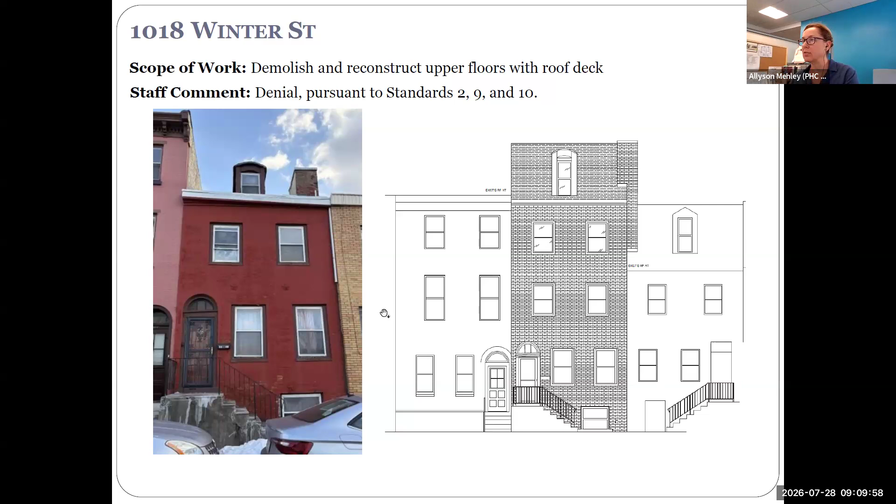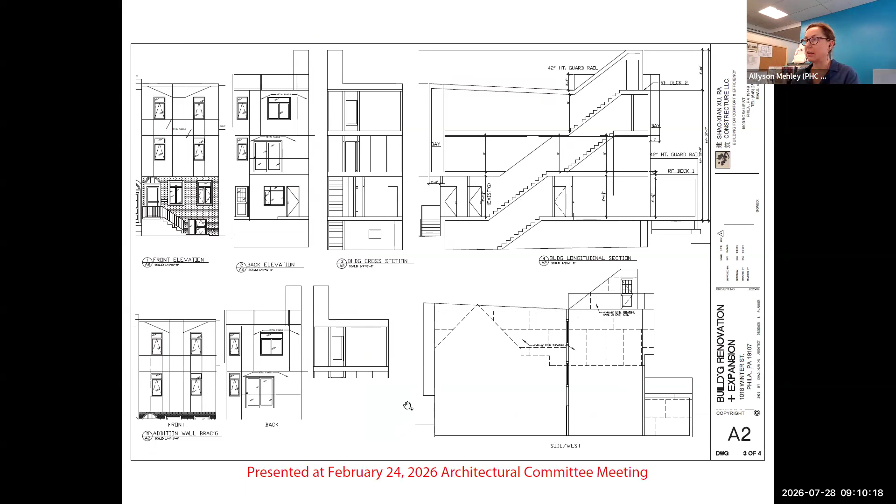To touch on what I just spoke about, this is what was originally presented to you in February. It included maintaining the first level and reconstructing a new second and third floor, and you could see the rear of the property. At the commission meeting, it was revised to maintain the front, the main block, with all new construction occurring at the rear of the property. That brings us to today and the current proposal.

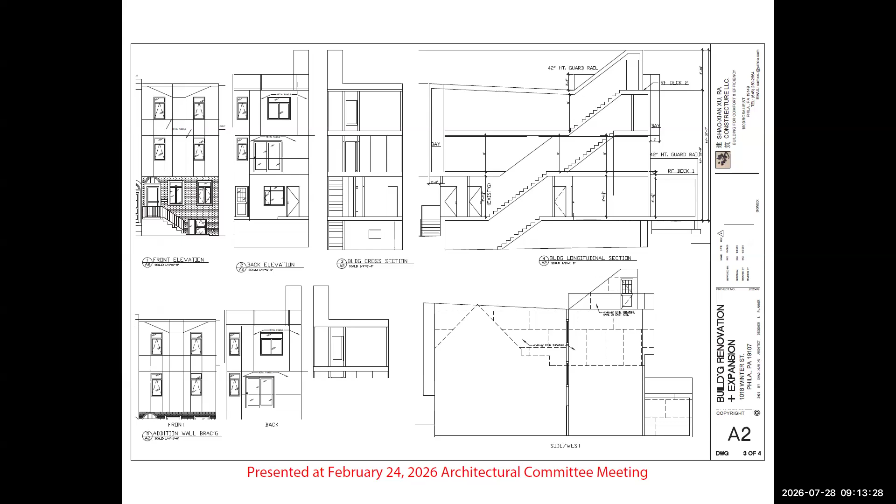The first submission was probably too much of a change to the front, particularly to the gable roof, which was completely different from the original style and material. So after the first review, we made changes and tried to keep the gable front, making all the changes in the back. But when we had the architectural report by the engineer walk through and identify the problems, we found there are too many issues to deal with.

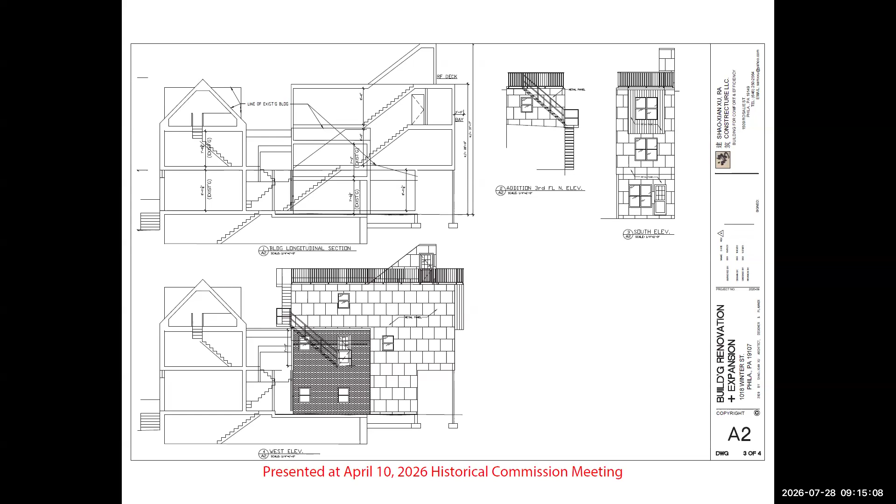Even if we make changes according to the engineer report, the end result is still very poor. In particular, the changes made throughout the years made the interior spaces very awkward and difficult to use, and the original stair is very small and narrow, completely outdated and not up to today's use standards. It also has multiple levels with a lot of different twists and turns, making it impossible to work with. Even if we try to modify the stairs to meet today's standards, there's just not enough room to make it work. So the engineer report recommends replacing the front brick wall because it's leaning and needs repair.

The gable joists are also undersized and sagging. So with all those problems, we considered the design, taking everything into consideration. We tried to keep the original appearance, but it's just not at the same height as before. Since we have to do all those engineering changes, we thought maybe we can raise the front gable by 1 story, to simplify things and make all those problems easier to resolve.

So we came up with this front gable raised 1 story, with the roof deck on the third floor accessed by the dormer. We made use of the good components, like the breezeway brick wall, incorporating it into the expanded back section of the building. That's basically what has been changed for the third time.

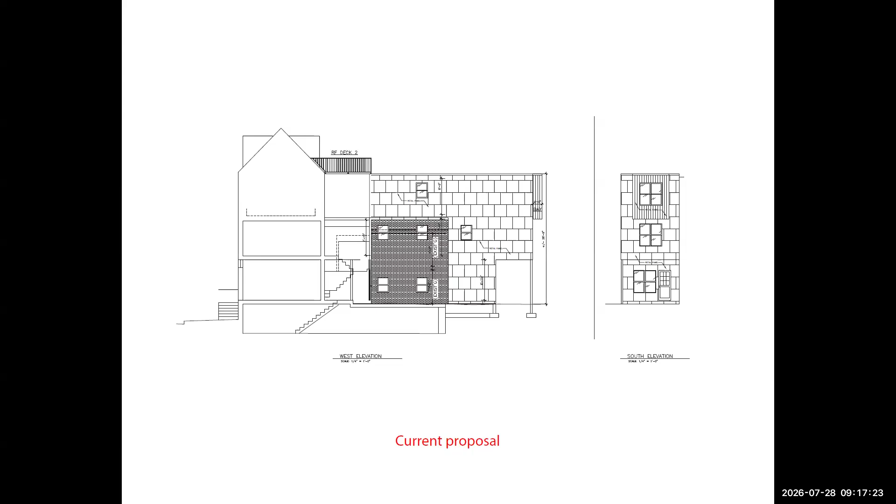So by doing so, we hope the front is very similar, except for its height. We try to keep the same appearance.

Excuse me, similar, Mr. Xu. We've reviewed the application and the documents submitted. It would be best that you focus on the engineer's report, which says the building needs to come down, as opposed to walking us through your documents, because we only have a limited amount of time to review each applicant on our agenda today.

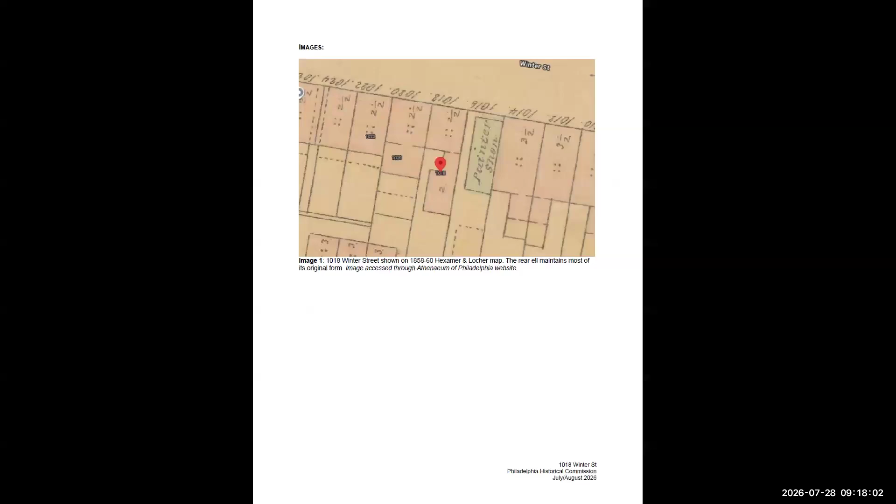Right, yeah. The engineer's report identified many problems and issues, and we are trying to keep what is still good and incorporate it into the design.

But I don't believe the engineering report is recommending total demolition of the building. No, it's not recommending total demolition. Most of the wood framing can either be replaced or sistered to address deficiencies, whether they're deterioration or undersized. It looks like the rear masonry wall could remain with repairs.

And I guess the roof framing is probably the worst of it. It looks like the biggest recommendation I saw was related to the front wall. I don't know that this is the right platform for me to agree or disagree with another engineer's report. I don't know that I see the exact same things, but these are just limited snapshots in time.

I guess my understanding would be that if you're replacing this wall, you would be rebuilding and replacing it in kind, because this is an individually designated property. So structurally, if you need to replace this wall, you would have to rebuild it as is, salvaging material that's there. I think you could save this.

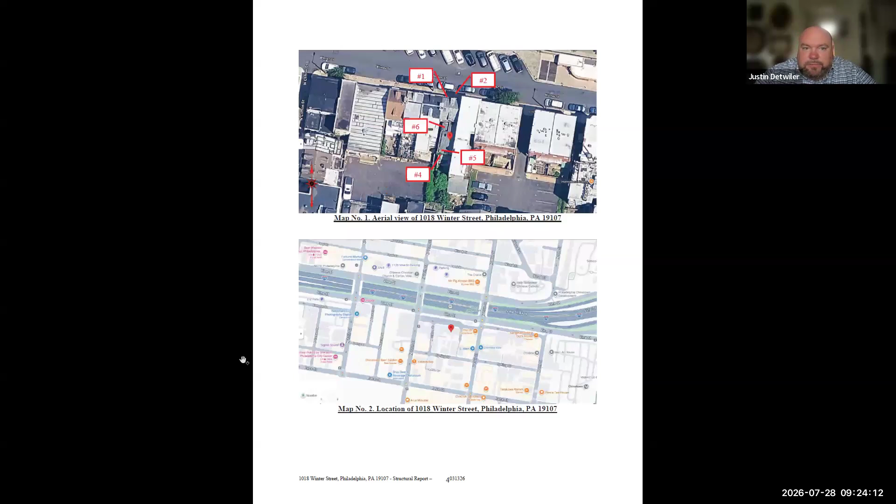Yeah, I do agree with you, Allyson, and with the previous committee and commission discussion, that this is a much better approach. The rear of the property is where the density should happen, and the current scale of the front of this building is the most important thing to preserve. So if we could go back a step to that scheme, I do agree that the overbuild in the back is a bit tall, a bit bulky and boxy.

But I think having that as a separate piece is preferred over attaching it to the front building, as we're seeing in the revised proposal. I think this overall is a better proposal. There are things that could be improved upon, but overall it's a much better approach.

Are there any more comments by the committee?

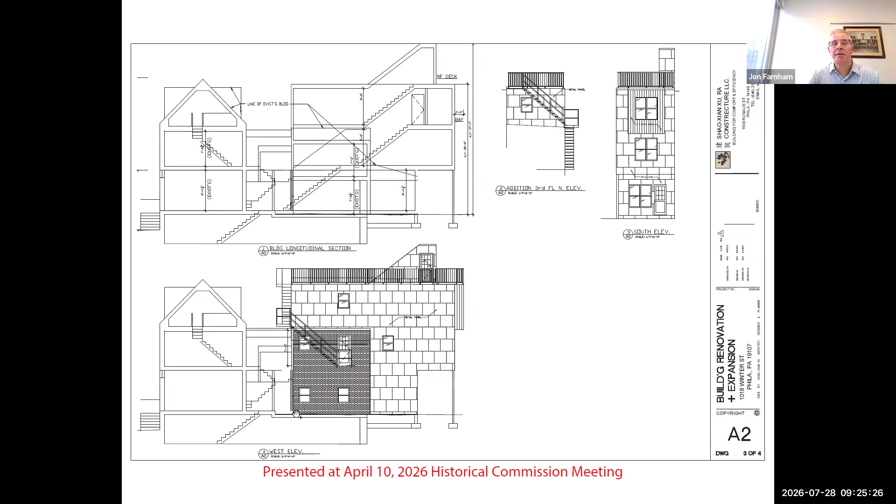John or Allyson, are there any public comments? Yes, one hand is raised. Ben Shi.

Hi, can you hear me? Yes, we can, Mr. Shi.

I'd like to give a comment in support of this application. In general, I think adding density here is really needed. The applicant's family are noted community leaders in Chinatown, and they've really been driven to increase the number of housing units in Chinatown. It's a really important issue for the community, as I am also involved with the community. I'd like to note that in terms of actual strict density, even with reconstruction of the front facade as 3 stories plus a dormer, that matches in totality with historical structures just across the block, even at the 900 block of Winter, where you have existing 3-story front facades with dormers.

So it's not like anything here would be out of context for the neighborhood.

This is a very predictable, very expected type of building typology being proposed here. This really comports with the incremental style of densification that Philadelphia row houses have received throughout the centuries. I know this structure was only designated because it was old, from the 1830s, but I think the overall intent of preserving, especially the arched doorway, the brick facade, and the arrangement of the bays and windows, justifies a lot of what you see here. Any rear addition, like other people have said, could compete with the actual roofline from looking at Winter Street. So I really want to commend the developer and the proposal here for creating what looks like a very compatible development and style with the overall context of Chinatown.

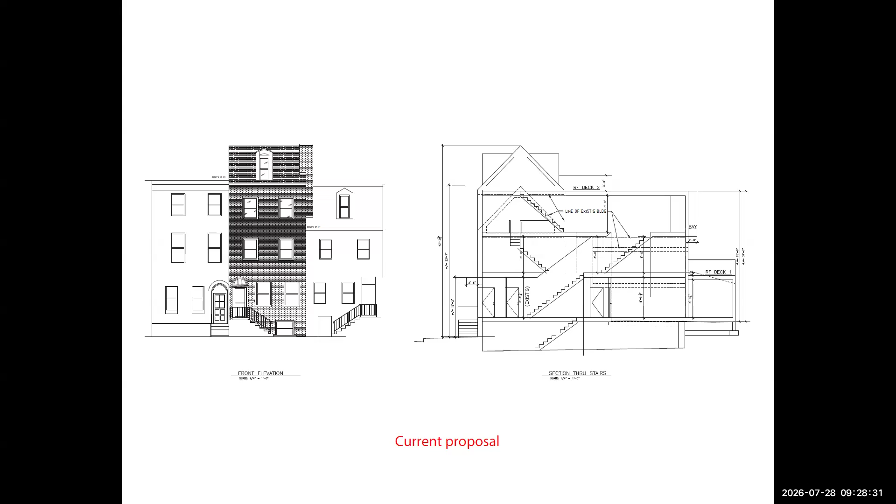Thank you. Are there any other public comments?

No other hands are raised.

Okay, can I get a motion for 1018 Winter Street, please?

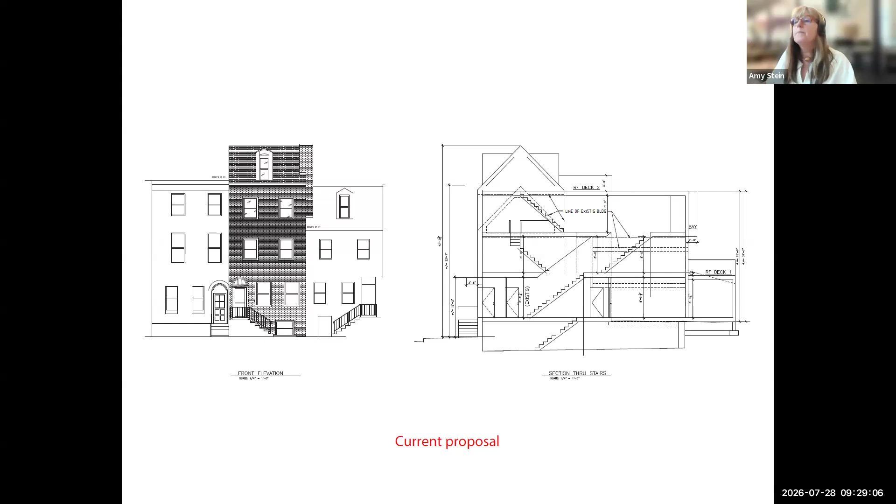I can go with the staff recommendation of denial pursuant to standards 2, 9, and 10. Do I have a second? I'll second. All in favor of the motion, please say aye. Aye, aye. Okay, the motion carries.

The next applicant is 124 and 126 South 7th Street.

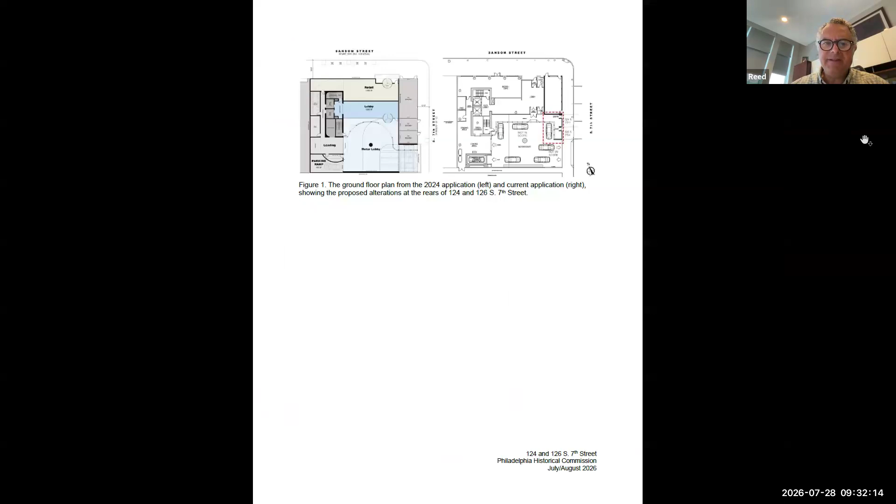Sure. I don't think anything was approved prior as it relates to these two properties specifically. We went through an extensive process on the rear property we own, the development site at 708 Sansom. These two properties are on 7th Street. As Kim mentioned, we're here solely because they were included on the Preservation Alliance's nomination for the Historic District for Jewelers Row. As Kim noted, both buildings are dilapidated and out of use, and have not been visible other than from the streetscape, because of the rear properties that used to exist.

For context, we've met with the Preservation Alliance, who I believe Hannah is here representing, to review our plan since they were the nominator for the district. We've also met with the Washington Square West Civic Association and the Society Hill Civic Association, who are constituents, and received no opposition to what we're planning. The plan is to refurbish the storefronts as they exist and make them functional, and we will do so in accordance with the standards under the ordinance as we review with staff. Happy to hear any questions you might have.

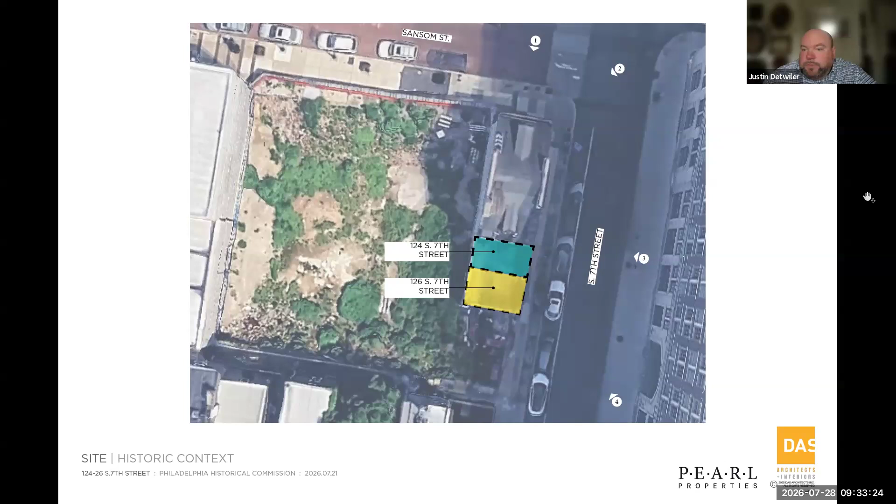So in essence, they're becoming a screen, right? They'll be open at the rear. It's a front facade, but completely open to daylight at the back. Is that right? Well, yes, you can see the plans that are attached. So we've made them as functional as possible.

So when you look through the storefronts, you're seeing the motor court beyond, right? That's how you would get to the motor court. There will be, on the 124 side, a door. I'm just trying to understand - there's no frosting on the glass, or anything else. You're seeing through them, and I'm not saying that's a bad thing.

I'm just asking. Well, we've articulated - if you pull back on the first plan, you can see the elevation, the rendering, which gives you a sense of what it will look like. But basically, you're not seeing anything. You're seeing a blue rectangle.

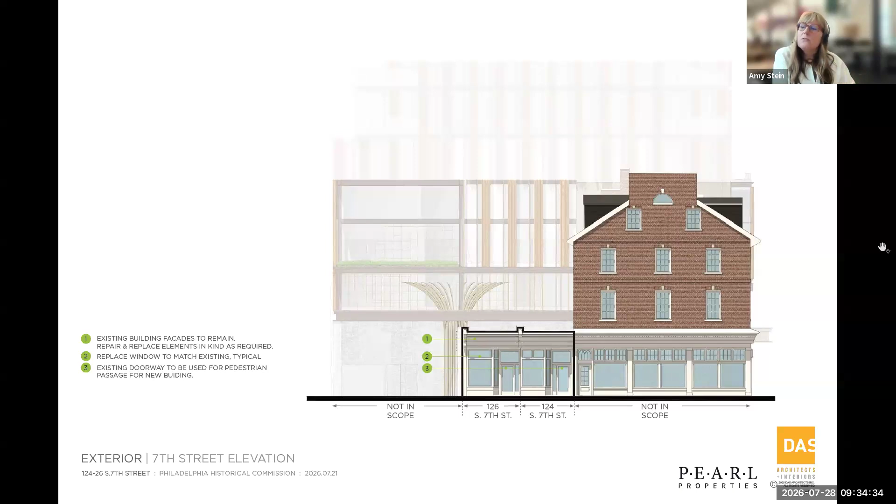How will the glass be treated? Will the glass be painted at the back side? Will you be able to look through the glass? It's not really a building, it's a false facade, so we're just wondering how that will be treated. Will it be transparent? Will it be opaque?

Well, we would need to review details, obviously, with staff as we pursue once we get to that stage. Is there a roof on this object?

Jay, do you want to jump in here and give us some context? Yeah, this is Jay Rockafellow from DAS Architects. Yes, there is a roof just over that first 3 or 4 feet when you come in. This is kind of creating a gateway to that motor court. I believe the intent now is that it will be clear glass, just to try to get as much light as we can into that space.

So it's a functioning pedestrian entrance into the motor court, basically. Yes. Okay.

And the wall - I would just say it was a little challenging to review because there's so little information. I would ask that before it goes before the full commission, there be a little bit more detail here. There's no dimensions - there's only one dimension on the entire thing, which is the side partition alongside the driving lane. So, how big are the doors?

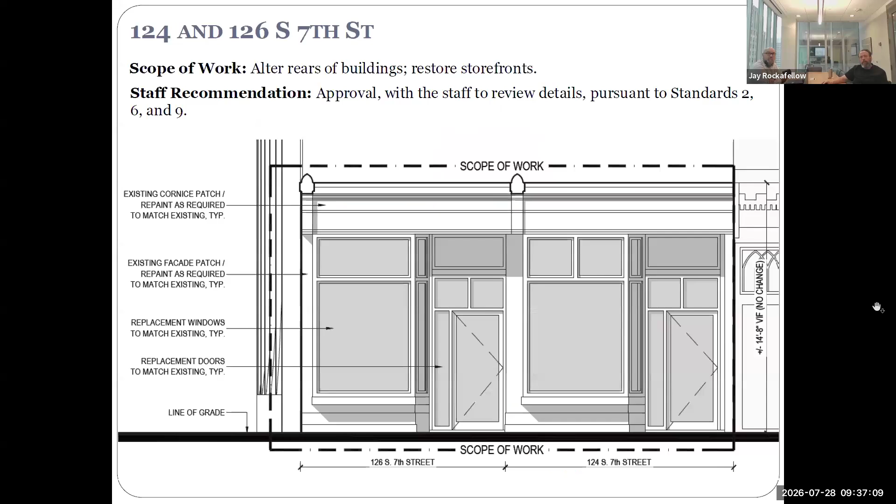So how big are those doors now? Are they 3-foot doors? Are they 2'6" doors? What's happening? They're 3-foot doors. And as mentioned, we would lower the sills to make these ADA compliant, because right now they have steps up, so they would get a little bit taller than they currently are. But they would be the same 3-foot doors that are there.

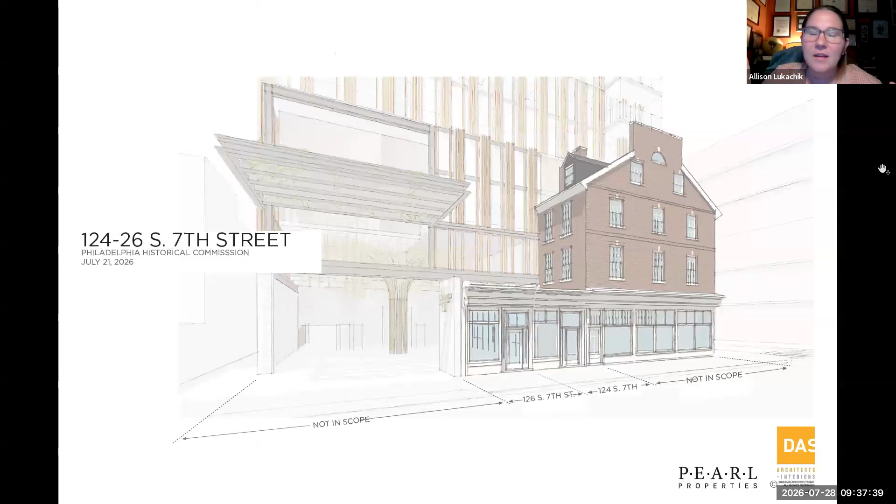Can I- I'm a little curious too. So it's open at the backside because this is now a portal, and there's like a tiny sliver of roof over it, and that's what it is? Correct. So, I mean, I'm just curious,

like from a stability perspective, we only have this level - how is this? I see you're adding some columns. I don't know if you're adding braces that's going to ultimately brace this wall for the long term or provide any sort of stability. It was a box in theory and it had stability from that, and now we just have this sort of portal, and it wasn't designed originally as a portal.

So I just want to make sure that what we're doing here is intended for the long term, and we don't have in 10 years an issue where it's falling apart and we can't fix it to save it. We are intending on adding kind of a steel frame - that's what the columns are, sort of at the exit.

We are adding a screen wall also at the southern side there, for its lateral stability. So this will all tie back in together into our new structure to reinforce it. And then everything is just being detailed to be what was once an enclosed building structure - now it's being detailed and treated as an exposed condition. Correct. Okay.

I guess, go ahead, go Amy. No, go ahead. I wanted to shift topics actually. So if you had a question about that, please continue.

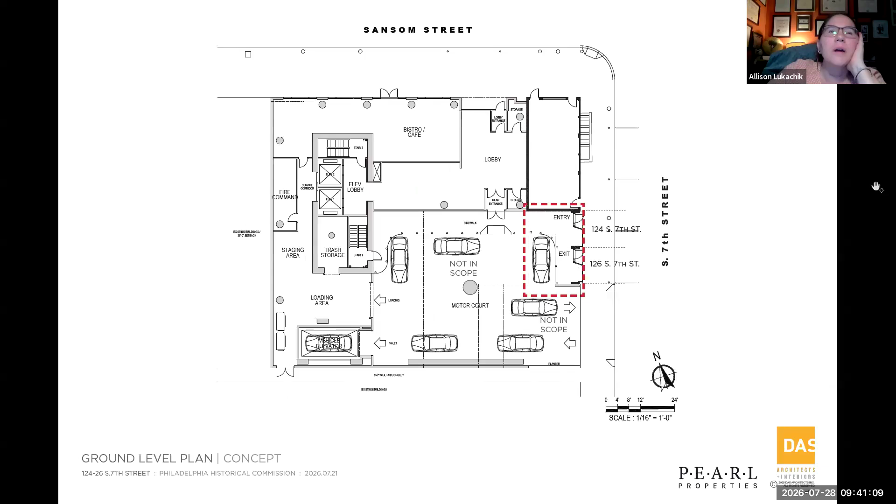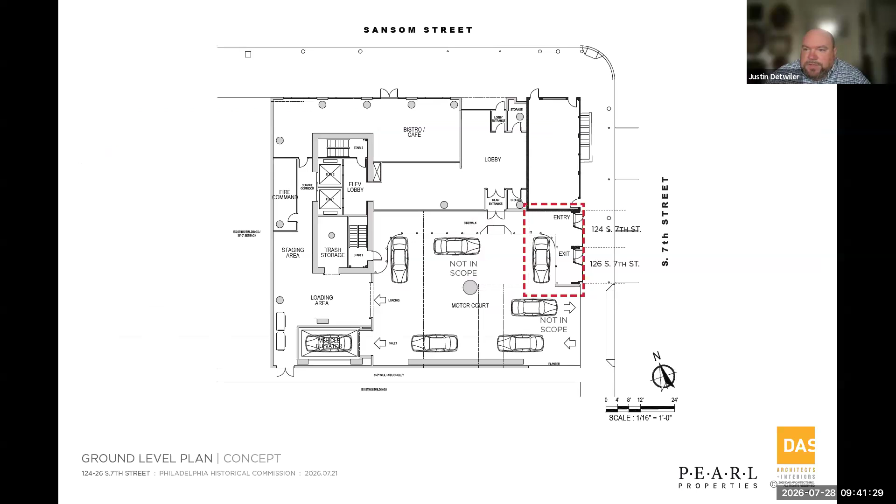So you're saying that sheet 9 of 11 is not what's proposed? I think sheet 9 of 11 shows how much of the existing structure they're proposing to retain, so that they could install a new column and then have their bracing and what have you to sort of stiffen it. And then in front of that, they'll build the mosaic wall.

Thank you. I think if you could just add a little bit of this information before it goes before the full commission, it would be easier to review, because I went back and forth trying to understand this, and it's actually very simple. Yeah, I think a little more information would help, because I missed it in the perspective, but now that I'm looking at it, I do like how that reads.

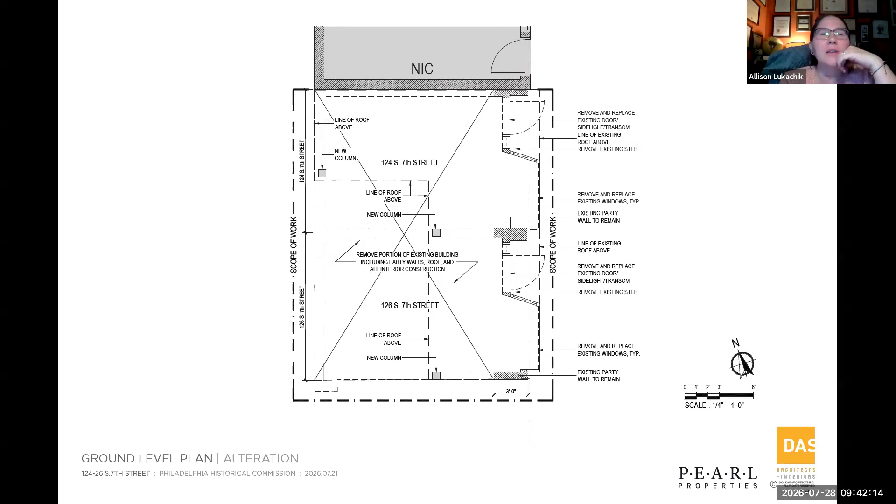So I agree that in theory and principle this works, particularly with that wider end wall. My question shifts gears a bit: we're building this massive high rise next to this tiny storefront and trying to preserve it. I'm wondering what protection strategies you are employing on the roof, the dormer, and the delicate details of the rear L that you're preserving during this massive operation happening behind that building. I'm concerned it will get hit by material, something swinging or dropping. Is there any mitigation strategy to protect the building, or any way to test whether it's moving?

I can take that, Jay. We will obviously need full permitting from L&I for the project, and that will necessarily include all of the safekeeping you're talking about. We've done a number of large high-rise developments in the city, and we're very painstaking about protection. We understand those issues, and actually this will enable us to be better at that from an overall site standpoint.

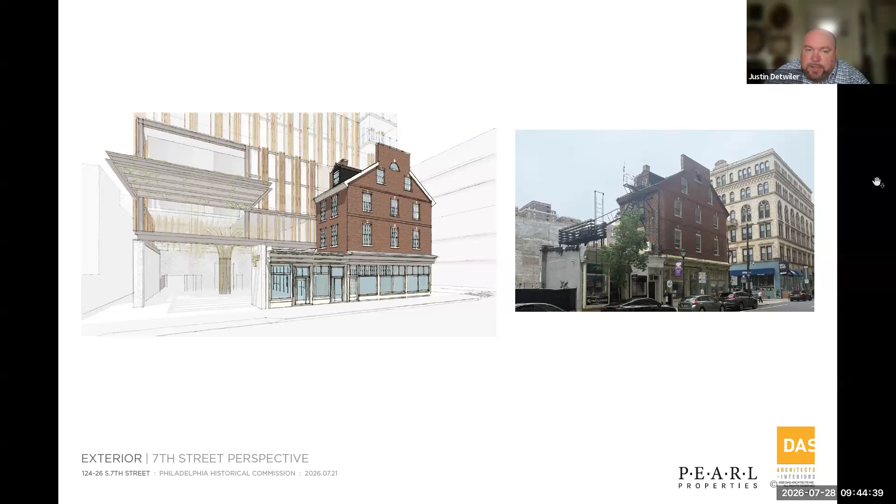Back to my earlier question about what is being replicated in this reconstruction or repair of the facade. I personally feel that what gets put back should not be a bastardized version that existed or was modified over time, but should have that historic original look. I would say it should have the type of window or door it previously did. I know those were double doors, but maybe they could be made into a single slab, so we're not replicating a door in an aesthetic that is not historic.

The character of this building is an earlier age, and so I would request that it has that earlier appearance as shown in the historic photo.

Are there any more committee comments? Kim, are there public comments, or John? Yes, one hand raised, David Traub.

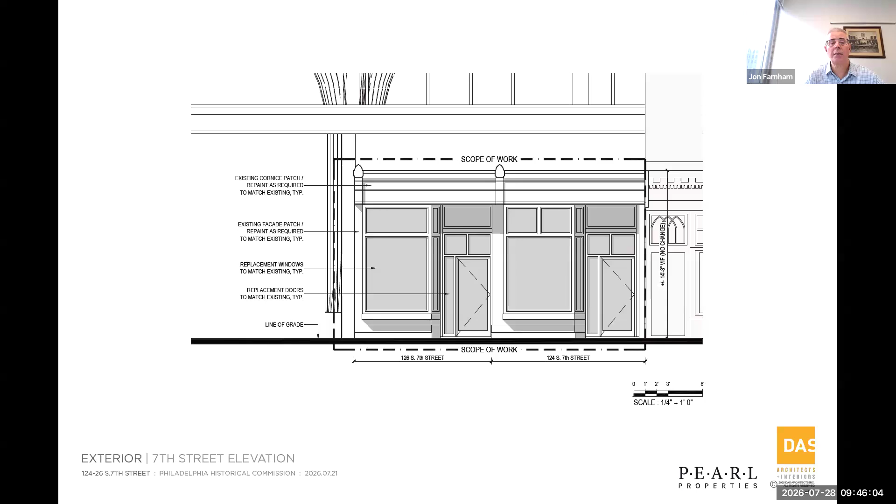Good morning, David Traub, representing Save Our Sites. Just a few comments about this proposal. I walked by the site yesterday and I was immensely impressed by the character and charm of the two little buildings. They're the sort of things that make Philadelphia really a very attractive city, unusual and in a special way. I do feel there will be a loss to the city and the immediate environment if these two buildings are turned into entry and exit ways. There's a little shop there in one of the buildings. It wasn't open yesterday, but it has great charm, and retaining retail on the street does add to the viability of the streetscape.

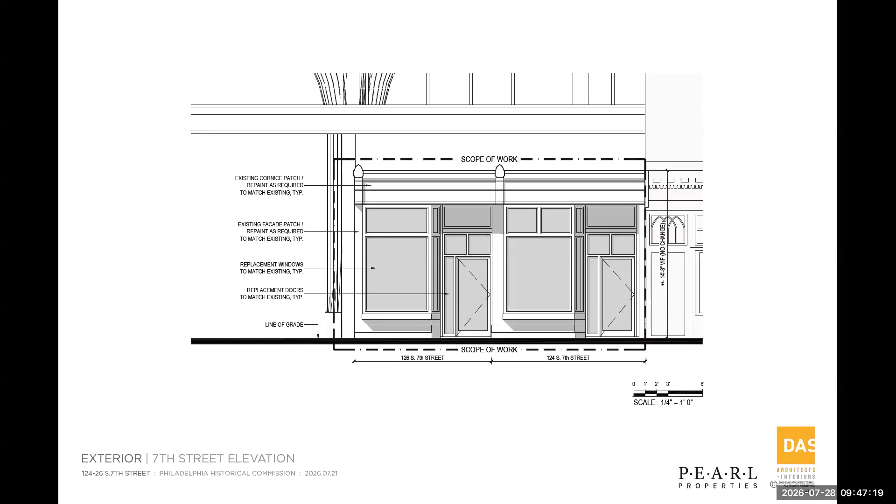Also, it occurs to me that the opening for the entry of the cars is very wide, very gaping. Is it possible to carve out the entryway in that sector of the property? Maybe that's not possible, I haven't studied the considerations, but that would save the two little buildings and have them retained as what they are.

Having said all of that, maybe what I propose is not possible, but I do agree entirely with Mr. Detweiler that the south wall of the building should be extended the full length of the existing middle buildings. It should read as a structure, as he says. And I agree that the detailing of the two little buildings should replicate that which is there, or would be surmised as the original historic appearance. Thank you very much.

Anyone, any other public comments? No other hands are raised. Okay, can I get a motion from the committee?

I'll make a motion to go with the staff recommendation of approval, but I'll amend it to say that the south wall should maintain its full width and that the storefronts should replicate the aesthetic of the 1959 historic image that was included in the staff packet, with the staff to review details pursuant to standards 2, 6, and 9.

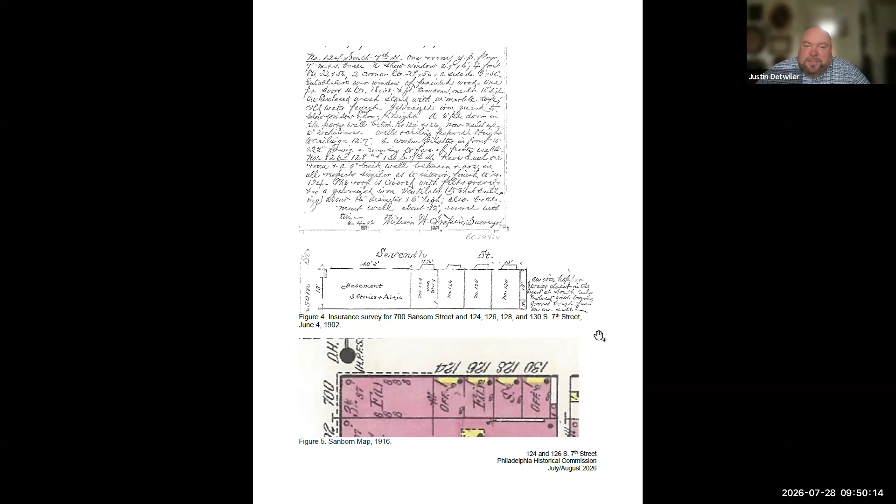I personally think more is better, especially since there's a roof structure cantilevering out beyond it. What do we think as a committee?

If I parse your motion, I mean, I'm fine with half of it because I'm honestly just thinking about the stability of how this all works. Having this sort of wall hanging out there, if you're not going to have a roof really tying it all together, I think the rendering is missing details, but I think it reads as a mass with that 9-foot wall. So that's the only part of your motion that I'm currently taking exception to. I'm trying to figure this out.

No, I understand that and I appreciate that. I think it needs to be 9 feet minimum, no less than that in my opinion. I think otherwise it doesn't read as a building. Right, and 9 is pushing it anyway. So I accept that 9-foot width in my motion.

I would second it. Okay, so Amy made a comment about protection of the existing building. Justin, would you be amenable to adding something in your motion about protection, to ensure there's no damage to that corner building when the larger building is constructed adjacent to it, behind it, above it, etc.? Yes, I would. Doesn't that get into means and methods of construction, though? I'm not saying how to do it, I'm just saying the intent to do it.

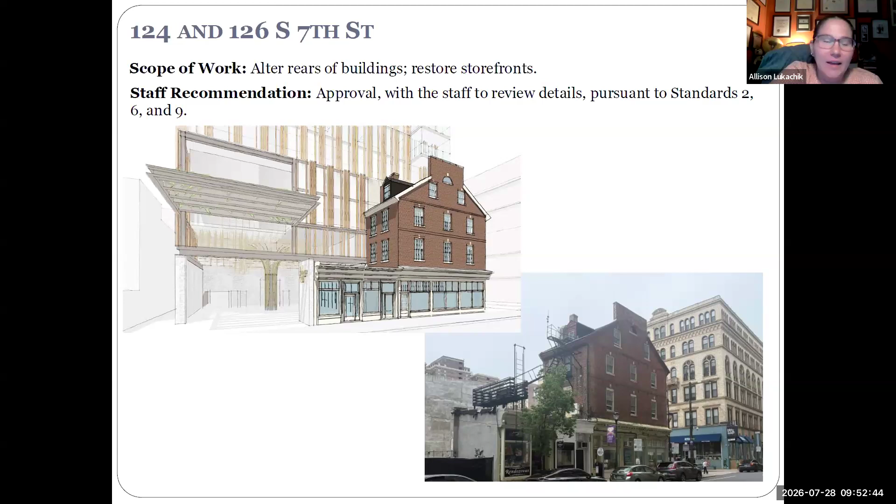Sam, are you okay with that amendment since you seconded the motion? Yes. Okay. Can we? I resecond my second. Okay. Can the committee vote on the motion as presented? Aye. Aye. Aye. Sam? Aye. Aye. Okay. Motion carries. Thank you.

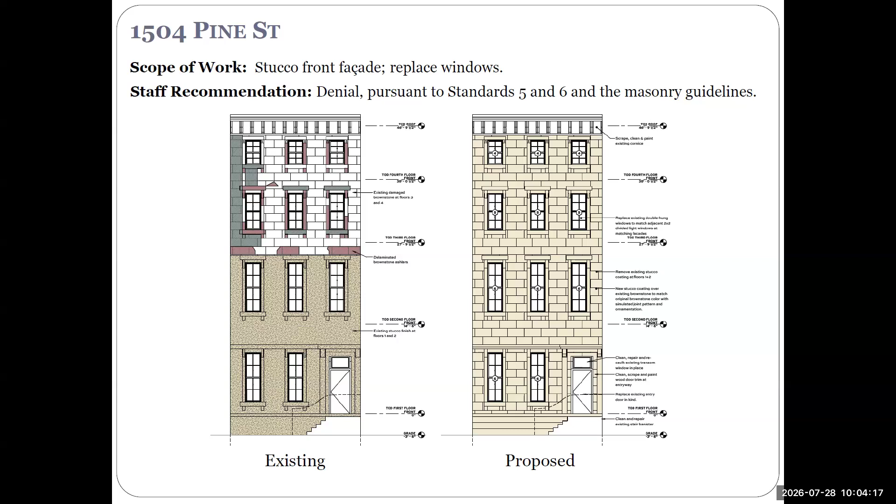I can't imagine that it's easy, or that everybody off the street can do it. And it makes sense, but. Yeah, I understand where you guys are coming from. I've been on both sides of the table.

My only question would be, there are 2 stories of stucco, and if the upper floors could be salvaged pretty easily, what does that look like in terms of this conversation? The other issue with EIFS is that it's basically applying a piece of insulation and then stuccoing on top of that. By doing that, you lose all the profiles of the upper 2 floors. So there's also a loss of historic fabric in that application versus a composite patch, where you can replicate the profiles that exist now.

Yeah, that definitely is true. One consideration ownership made, I believe, is to do typical masonry stucco on top of the brownstone. That way we'd get tighter to the window surrounds and could simulate the mortar beds of the joints. I'm not sure about applying a traditional 3-coat stucco to the brownstone without putting lath on the substrate, so you may end up losing some profiles versus composite patches, which actually replicate all the profiles that may have been lost. So it would be a shame if the upper 2 floors look like the lower 2 floors, but I'm not supposed to be editorial on this committee.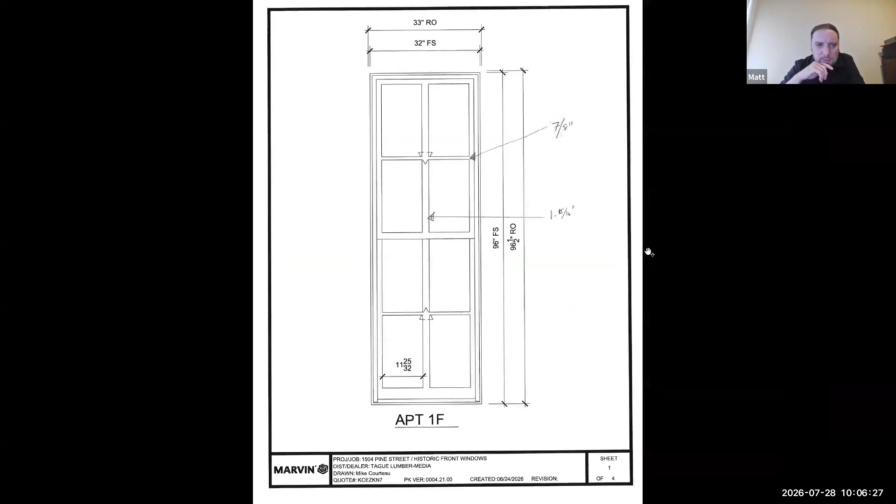Understood. The upper window surrounds are very beat up too. If you go back to the pictures, Ted, you can see a lot of detail if you scroll to some of the buildings that are in better shape on the block. I think it was the next one down, maybe. We had a few pictures of buildings in good shape on the block. Maybe go down one more. I just saw it flash. I guess one up, sorry.

There we go. These 2 pictures show what the windows were intended to look like, with a lot more detail. Most houses on the block have deteriorated to the point of really just having flat window surrounds. You can barely tell there's a sill versus a header versus the jambs and extensions. So we were intending to just wrap what remains there as much as possible. I don't think we're going to be able to replicate it back to its original profile without an exorbitant cost increase.

I did have one question for you, Nan, about cast stone. Is that something we would use to replace delaminated portions of this brownstone, like some of those headers and sills? That's what I've done on projects. You would need to talk to Ted about whether the staff would consider one-for-one replacements of individual pieces as opposed to coating the entire facade with an imitation material.

Right, okay, great, that's good to know. That might be a more economical way of achieving what the commission is after. I did have one other question for the whole committee. In terms of the first and second floor stucco, taking that down and exploring what's back there and what condition it's in, is that something we need your input and approval on to do? How should we go about figuring out what the condition of the first two floors is?

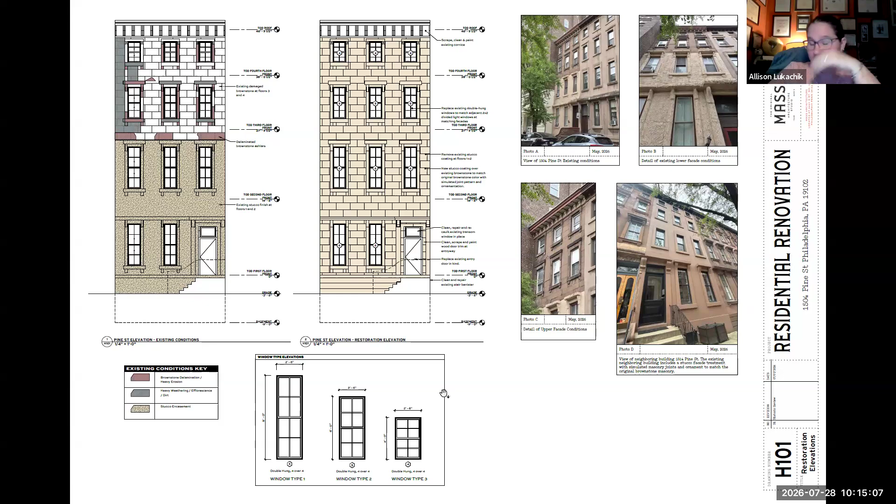So for now, as proposed, I'll make a motion of going with the staff recommendation of denial pursuant to Standards 5, 6 in the masonry guidelines, with the expectation that you can probably find some sort of happy medium in the process ahead. Do I have a second on Justin's motion? I'll second. Okay, all in favor? Aye, aye, aye. Anybody opposed? Motion carries.

Thank you. We're going to move on to the next application, 1601 Mount Vernon Street.

Okay, can folks hear me and see the screen there? We can. Okay, good. I don't see her in the meeting, but if Nashe Potois is here, if she'd raise her hand to be elevated to panelist. If anyone else is here representing this application, if they would raise their hand to be raised to panelist. Hopefully there's someone here from the project. And I'll go ahead and read a brief overview.

This application calls for amending the Historical Commission's July 2023 approval for the rehabilitation of the Robert Purvis House. The developer seeks approval to substitute cast stone for marble on the front facade stoop and door surround, owing to the high cost of marble. The applicant is determining the viability of cast stone for the water table.

The property at 1601 Mount Vernon Street is significant in the Spring Garden Historic District, owing to its association with Robert Purvis, a Black anti-slavery activist, writer, and lecturer who resided at the property for the final years of his life, circa 1875 to 1898.

Over the last few decades, the property languished and was subject to multiple violations, proposed but unimplemented projects, and court orders, culminating in an Act 135 conservatorship. The city demolished the rear L to abate a dangerous condition in 2012. After years of deterioration and legal proceedings, the property is being rehabilitated.

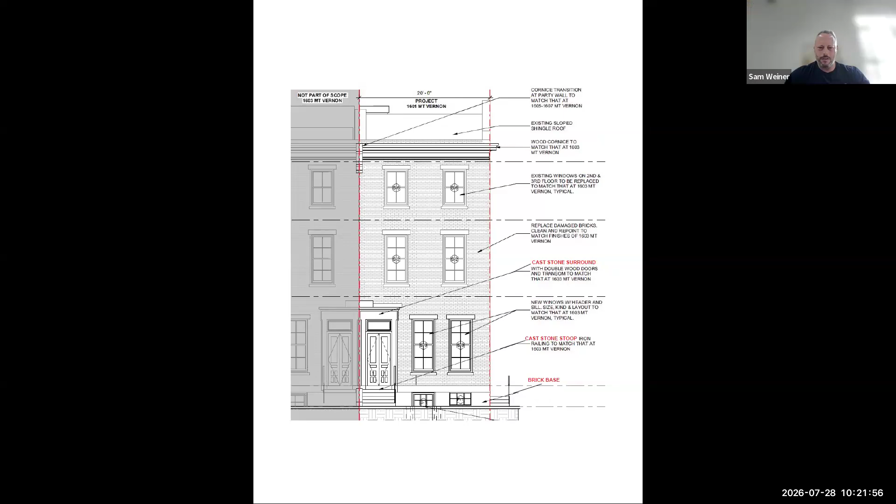I'm just shocked that you're acquiescing on this so much on the marble versus cast stone. I drive by this property every single day. I've looked to buy it, I can't tell you how many times over the last few years. When I did my due diligence, I know what it costs to build this stuff, and I chose not to move forward. But to do the door surround and the front steps in the original material, being that this is a significant home -- this isn't just on a block that's in a designated area, this is a significant property -- I'm just surprised that we're willing to acquiesce that much on it.

That's all. And did they get prices? I'm usually the opposite. I was going to say, you switch sides, Sam. Have they gotten prices from more than one person? The cost of materials sounds really high.

I don't know if they were able to get more than one bid for the marble. I have no reason to believe that. I think the developer has run into more cost difficulty than they expected. And while it's not our job to make sure everybody makes a nice profit on a project, we've had enough back and forth that as staff, we felt this project should keep moving forward.

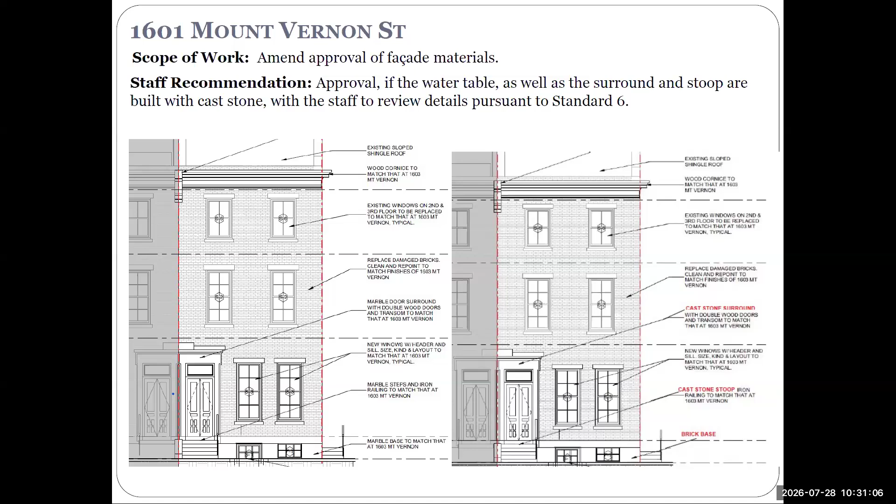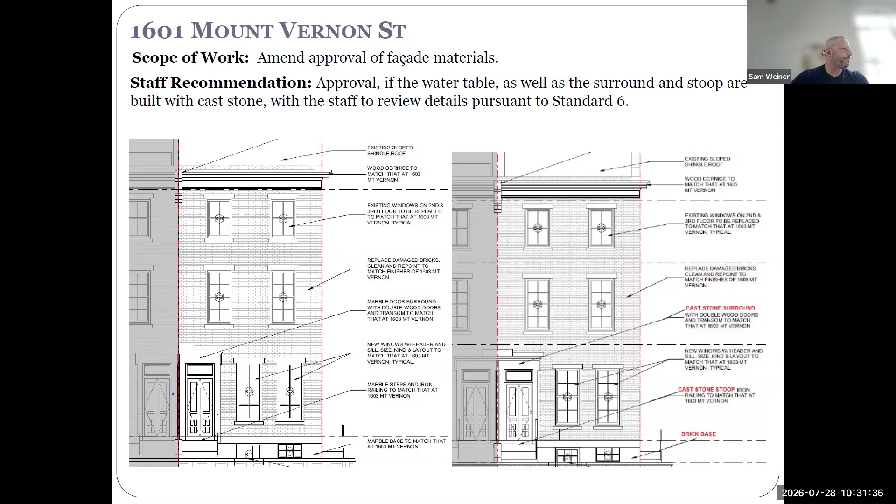I will make a motion of denial as presented, given incompleteness of information, and leave it at that. Do I have a second? A second. All in favor? Aye. Aye. Motion carries.

We can move on to the last application on our agenda today, which is 4275 Viola Street. I'm not sure how it's pronounced in Philly.

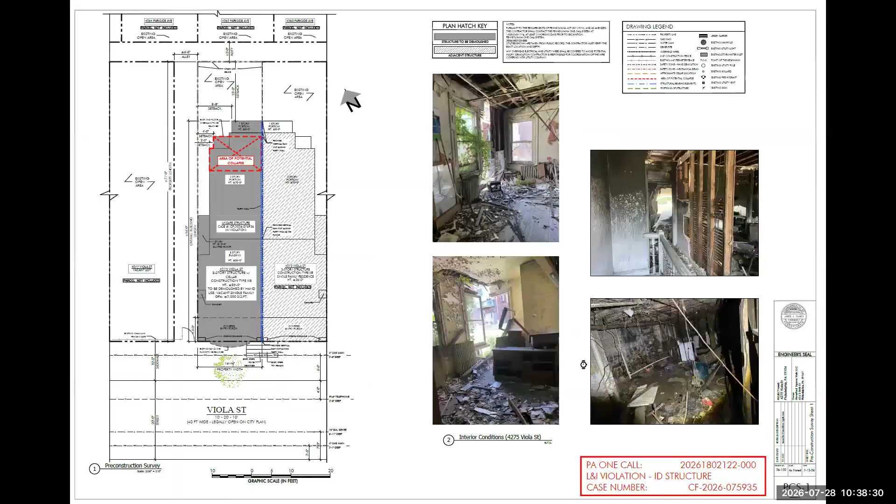I have a question, maybe for John Farnham. You said that L&I has issued four violations for this property as far back as 2021. Were any of those remedied, or were they all outstanding? It's my understanding that none of those were ever complied with. I know more about the more recent violations, and there was at least an application to repair the property submitted last year, but for unknown reasons that project did not move forward. Thank you.

I'm going to just go out and weigh in here. There are other ways to brace these walls rather than making it an obnoxious intrusion into the street and trying to create an argument that you just can't do it. You could create an interior frame just above each floor level and brace it internally to itself, creating a new box. You're basically running walers around the wall and bracing it horizontally to itself. So I think there are other ways, and I say this from experience, where we've done this on other projects.

I think you've heard that we understand the back portion is unsafe, potentially from neglect. I'll put a pin in that, but it's unsafe. So if you're going to demolish the back portion, it sounds like that's beyond saving. But I'd argue there are ways to brace the front portion to allow it to be safe, to demolish the damaged interior framing and make positive new connections. So I'm not convinced that the front half can't be saved in a way that doesn't infringe upon public access to the sidewalk and streets around it.

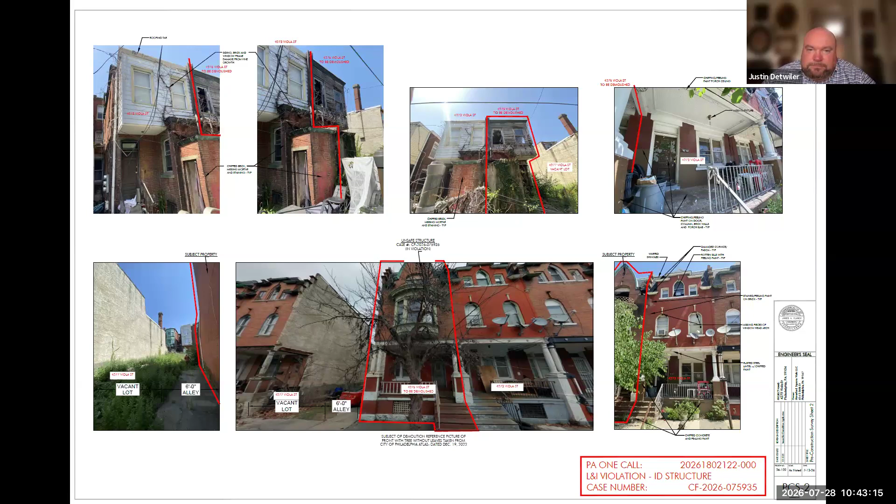John, are there any public comments? Yes, there are several hands raised. Why don't we go with those, please? Okay, first is Hannah Stark.

Good morning, committee members. This is Hannah Stark speaking on behalf of the Preservation Alliance. A lot of the committee members have already hit the exact points we wanted to make. We believe this property is extremely significant to the Parkside Historic District. If to make the property safe the rear L needs to be demolished, we can understand that, but under no circumstances should the front portion, the facade, be demolished. Thank you for the time to speak this morning.

Thanks. Next is Evan Litvin. Hello, can you hear me? Yes, we can. Thank you.

I just want to make a brief comment. This is Evan Litvin. I'm a registered architect and one of the largest commercial property owners in this neighborhood. I want to fully support the committee's comments on this, Allison, Amy, and Justin's comments. This is an extremely important block to this neighborhood, and I believe the front should be maintained if at all possible. It does appear the back is beyond saving, but the front absolutely should be maintained. Thank you.

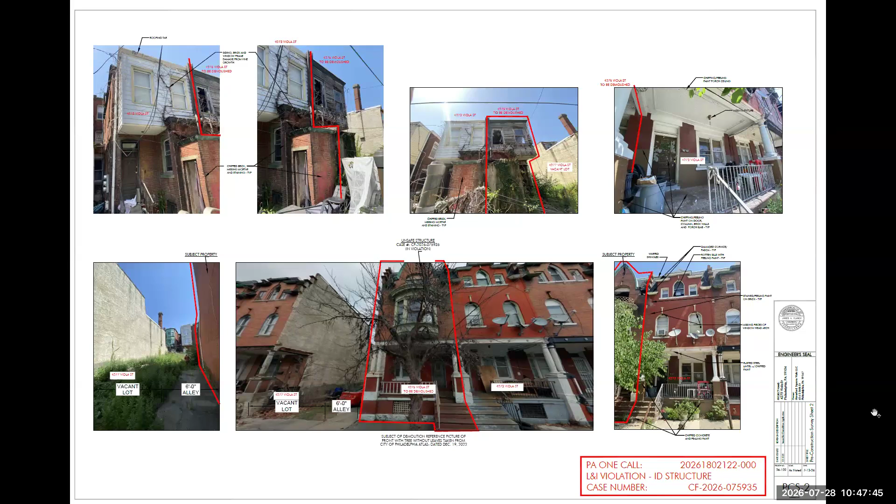This company bought this property knowing it was historic, and instead of making right on their make-safe permits, they've let them expire, hoping to push this through the process and enhance their leverage against the community fighting this demolition. I would encourage this committee to weigh their options carefully. We would not like to see the back L demolished if at all possible, but if that is the only way forward, we understand. I think there is a future that can keep the entirety of the structure intact.

Thank you. Anybody else, John? No other hands are raised. Okay, can I get a motion by a committee member for this application, please?